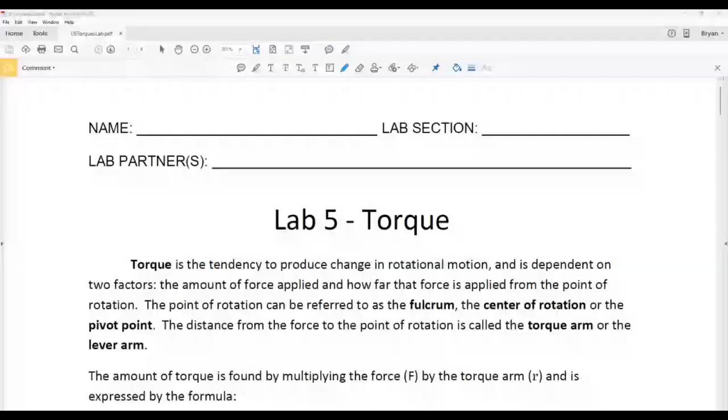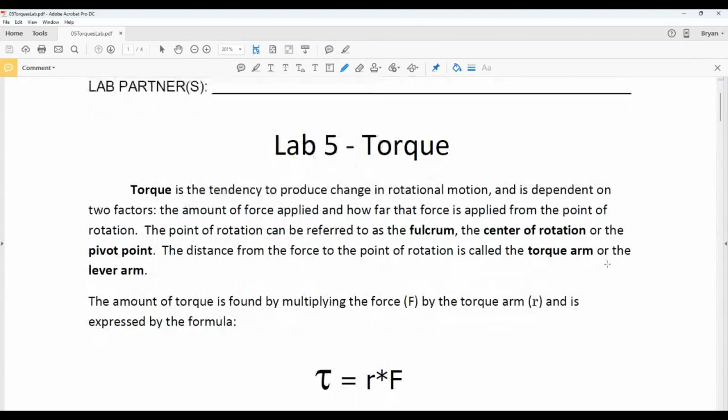All right, so let's go ahead and talk through some of the information necessary to complete Lab 5. In this lab, we're going to be focusing on torque and then balancing torque to look for missing information. So torque in general, because it starts with the letter T, and so do several other things, we have the Greek letter tau. So tau, which just basically looks like a letter T, but it's Greek, so it's kind of fancy looking. This is going to be the radius, or sometimes L for leverage, of the lever arm or torque arm multiplied by whatever force is there.

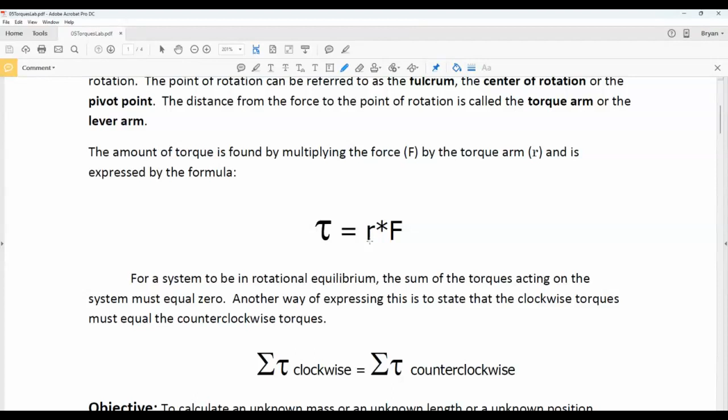So if you want to increase torque, if you've got a constant radius, then you'll need more force. If you have a constant force, you'll need a bigger radius. Then if we combine this with other torques, if we want to achieve balance or equilibrium, then whatever torque we have going in one direction has to be equal and opposite to the torque going in another direction. If you have too much clockwise torque, then obviously it'll turn and go clockwise. If you have too much counterclockwise torque, then it'll turn and go counterclockwise. The only way it can hang in balance is if they're the same.

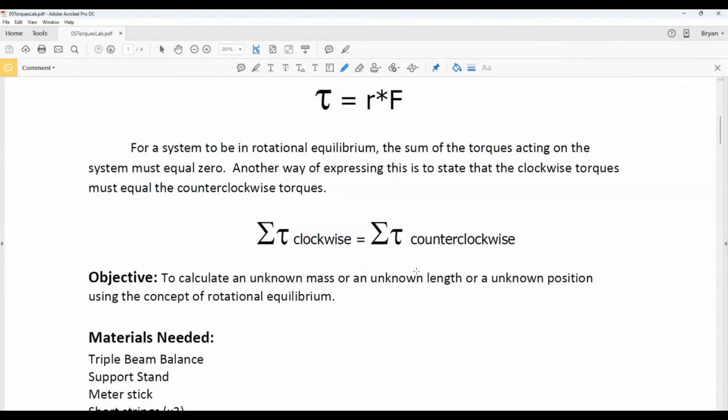Now, we do need to be careful on the wording here a bit. We don't typically want to say that things would just fall down in this case because they're tied off with a physical pivot point or fulcrum. If they don't balance, they're going to rotate around that pivot point. Okay, so, I suppose we can squeeze it in here. It's kind of a setup zero that we want to talk about first.

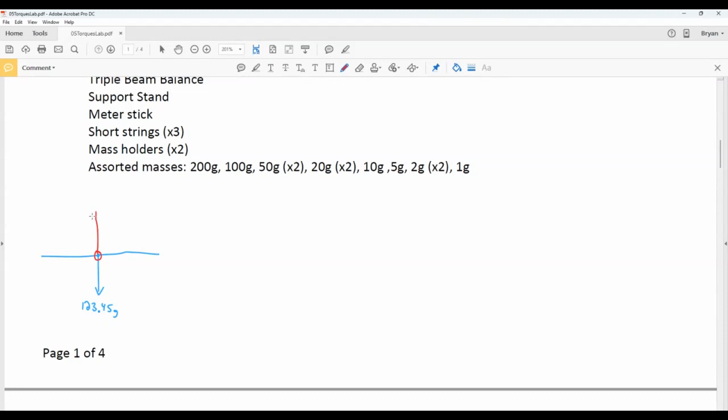So if we draw a meter stick, just a straight line, simplest version of what I can draw, and say that it has a mass that comes down, and I'm going to be very unoriginal with this. Let's say that it's 123.45 grams. Then you probably know already that if I want to support this, if I just want to hold it by, say, tying a string or putting my finger underneath it, and I want to hold it in place with one force and nothing else going on, then I'm going to have to hold that under the middle of the meter stick, which, because 1 meter is 100 centimeters, is going to be 50.

Now, the reason this works is because then the mass of the meter stick itself is directly at the pivot point, has zero leverage or zero radius, and therefore makes zero torque. So that's the reason why it works that way. If we have a meter stick and we hold it in a different spot, again, the mass is going to average out to be in the middle, so 123.45 grams. That's going to be at 50 still, because any reasonably well-made meter stick will have the center of gravity at the middle. But let's say now that I take the string and I move it over slightly. I put it here.

And again, I'm not going to try very hard on these numbers. So let's say that this is at 34.56 centimeters. What's going to happen is that there's a pivot point here, but there's actually something away from the pivot point, something that has leverage. So when we talk about R, we mean the distance from here to here. And what that's going to do is cause this to turn down in that direction. So it's going to create torque.

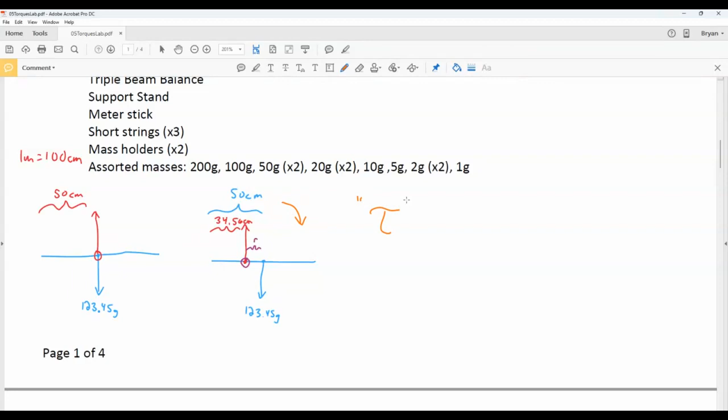In proper units, torque needs to be in newtons and meters, but in improper units, let's just kind of set up and see where this is going at first. So I'm going to say torque, and I'm going to put it in parentheses because it's really not quite proper. Technically, this is supposed to be radius times force like we saw above, but I'm going to say radius times mass, and again, know that this isn't quite proper torque.

So that radius, that distance there, we want to use something called relative position. We need to avoid absolute positions here. So it's not important in my formula that the mass is at 50 centimeters or the string is at 34.56. What is important to me is how far apart those things are from each other. So I want the difference. Look at where the R is drawn in the picture.

I want the difference between these. We're going to assume that the meter stick is well made enough that the center of gravity is going to be exactly at 50. And that's going to be important for significant digits, which we're not going to look at too much today, but it is going to control some of how the rounding happens later.

All right, and then the mass that's here, again, this is improper because normally we should be changing the units, but we can use this to work down and get some kind of answer for this part so far. All right, so again, our improper torque. If we find this difference, then we're going to have 15.44 centimeters. That's going to multiply by the mass that's hanging there, and basically 2, 3, and apparently I can't count.

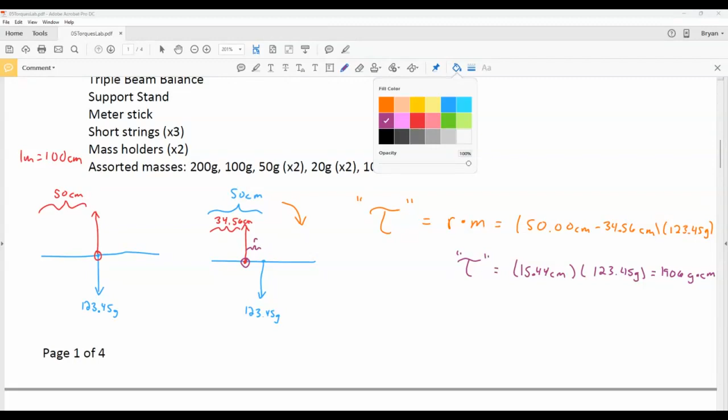To see how this relates to our normal numbers that we'd want to use for torque, we can take and convert this. So notice I didn't put the quotes on it this time, but I can take 1,906 grams times centimeters, stick that over 1, and I can chain together our conversions. So a couple of different ways that we can set this up to streamline things slightly. We want to remember that a kilogram is 1,000 grams. But I'm not going to put 1 kilogram on top, because then we have to take a kilogram and convert it into newtons. If we assume that we're on Earth at roughly sea level like we normally are, then we can sort of chain that together.

1,000 grams technically turns into a kilogram. The kilogram turns into 9.8 newtons. So by the transitive property from geometry way back when, we can say that these two things are equal to each other. Okay, and then also we need to remember that 100 centimeters make 1 meter. Looking at our units and making sure everything cancels the way that we expect. Grams cancel grams, centimeters cancel centimeters, and we get newtons times meters.

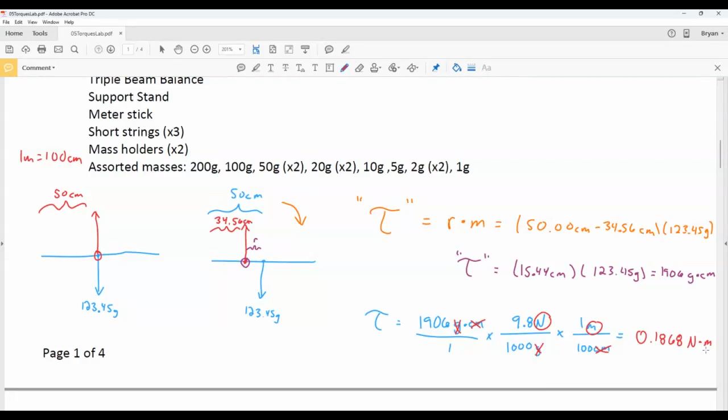Okay, so taking that number and multiplying by 9.8, and then dividing it by 100, and then dividing that by 1,000 is going to give us approximately 0.1868 newtons times meters. So you can see the units are vastly different from each other. Now, a nice thing is going to happen because we're balancing torques with most of these questions. So up here, notice that clockwise torque is equal to counterclockwise torque.

Then even if we do go through the steps and we convert everything into proper torques, those conversions are pretty much going to cancel each other out, because they would have needed to happen with each different set of grams and each different set of centimeters. And so with a single pivot point, you can use just about whatever units you want, as long as they actually measure the stuff you're talking about. So like, you can't measure mass in seconds, because that won't make sense. But you can measure mass in grams or kilograms. You could technically use pounds here if you wanted to, and this equation would still work.

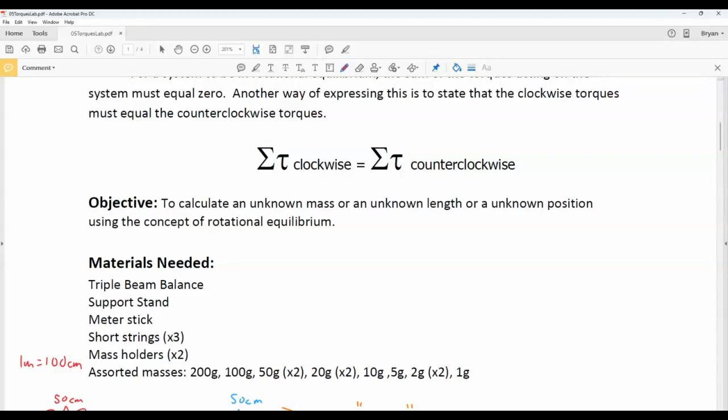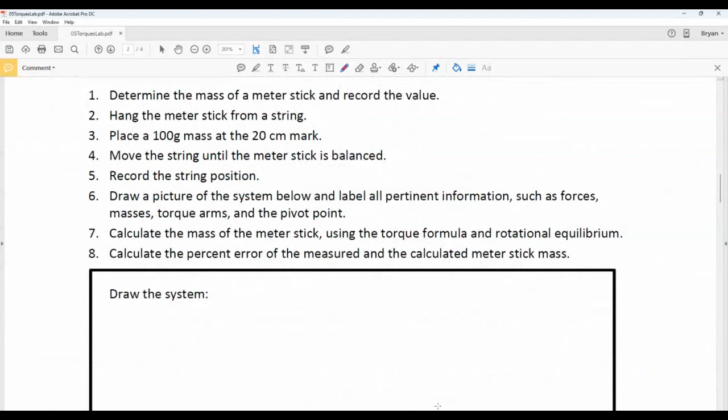Okay, so let's use that information. Again, what we just looked at is kind of like a setup 0, if you will. So if we move on to setup 1, and if we were to follow the instructions here, we're going to take a 100-gram mass, put it at a certain spot. The very first thing we probably want to do is draw this all, so that we can see what's going on. All right, so we're going to draw the meter stick first, and then basically before we do anything else, we want to make sure that we remember that it has a center of gravity in the middle, so the mass is going to average to be the middle.

All right, so here's my meter stick, and then the very first thing, we'll draw a line down. Now for right now, we're pretending we don't know what this mass is, so just M, and that's a little s for mass of the stick. And assuming it's a reasonably well-made meter stick, then this is going to happen at 50.

Okay, and then it tells us that we're going to put a 100-gram mass in another position. So this one's going to go at the 20 centimeter mark. Okay, and so I hope it makes sense. I'm going to draw a couple of things that are wrong first.

But let's say that I try to put my string over here to balance everything, then notice that all my torques are going to go around in that direction, and there's no chance that it was ever going to balance. Likewise, if I try to put my string somewhere over here and make that pull up, then everything's trying to go around in this direction, and they're working together. There's no chance that they were ever going to balance each other.

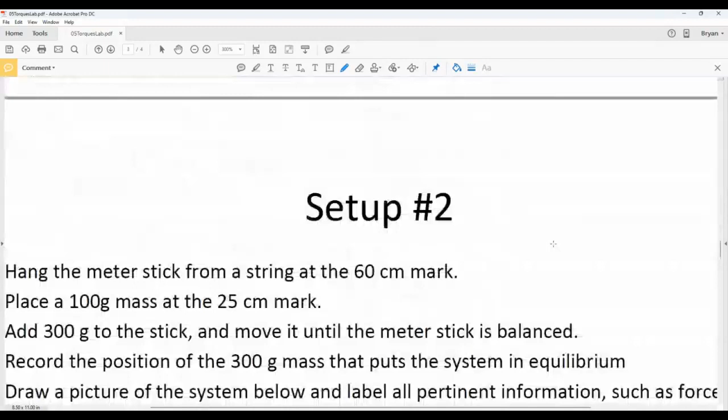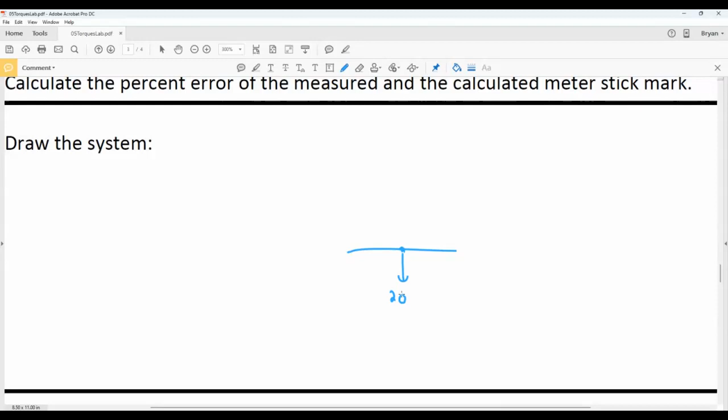Eventually I'll get there. But the first part is still exactly the same. We're going to want to draw a meter stick. I always draw the center of mass first because this is the main part that students will forget when they get stuck. They'll draw a picture and try to set up a formula. And if they are missing information, it's usually this part, because you don't physically see anything for it the way you would if you were to build the other setups.

Okay, then now reading the directions a little bit further, at the 25 centimeter mark, so halfway from 0 to 50, we have a 100 gram mass. Okay, and then we have a string tied at 60. So the string is tied here.

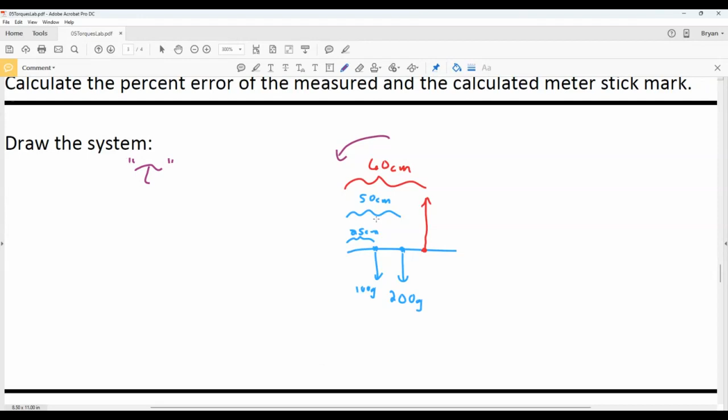Now, relative to the example I gave earlier, whenever we were holding the meter stick off center and we weren't doing any other forces or masses hanging there, then if you only have torque in one direction, then things are going to go in that direction. So if I'm looking this way and I don't read the rest of the question yet, then there's no chance that this was ever going to balance, because these two things are both going to make torque. And again, that's torque. That's going to work together and try to turn even more in the same direction.

So let's set up and see if we can find that number so far, and then use that to finish solving whatever's left over. So if we go from left to right, thinking from 0 to 100, then the first object that's there is sitting at the 25 centimeter mark. But remember, you want to think of relative positions. So 25 centimeters needs to be taken away from the string position so that we can find out how much leverage it has, and we need to pay attention to what's hanging there. And plus sign, these torques are working with each other.

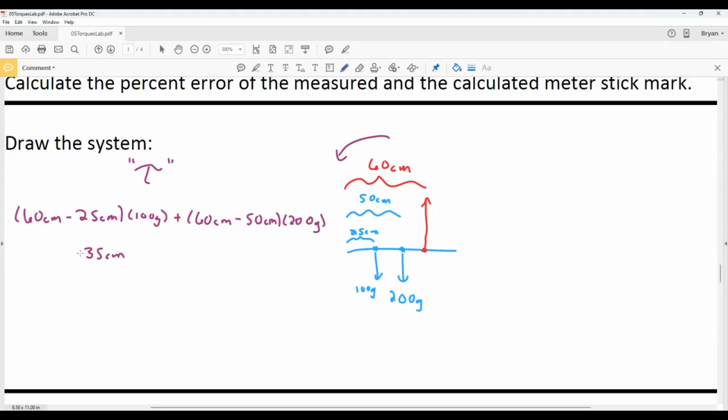This other one compares to the 60 where the string is, but this is the mass that averages at 50. And then the mass that's hanging there is the full mass of the stick, because that's how the center of gravity works, and that's going to be 200. So this thing we can simplify down a fair bit. We can find each of these relative positions by subtracting through and finding these differences.

So we get 35 and 10 centimeters respectively, multiplied by their masses, and that's going to give us individual torque type measurements for these. The first one works itself out to be 3,500 grams times centimeters, and the second one works out to be 2,000 grams times centimeters. So working together, these things combined will give us 5,500 grams times centimeters.

And whatever torque is made there has to be balanced out by a torque that happens equal and opposite. So there's no way that it can still be turning in the same direction. I need to somehow have that amount of torque going the other way. And that's where, if we read the last part of the question, we can figure out what's going on. We have a 300 gram mass that has to go somewhere. And as it turns out, that's going to need to be over here so that we can balance that part out. So 300 grams. We don't know where that's going to need to go. So for right now, we'll just draw in and we'll call that R.

Which makes this side actually very simple. R is that relative position, because that's how the formula works, multiplied by the 300 grams that are hanging there. And that doesn't simplify or do anything. So that's really just going to come down and come into my formula. All right, then as far as the units, we can cancel the grams first, as long as you do it at some point, but we can do it now to have less to write down. We would divide by 300 in order to work this down to R, and then we get that R is 18 1/3, so 18.33 centimeters.

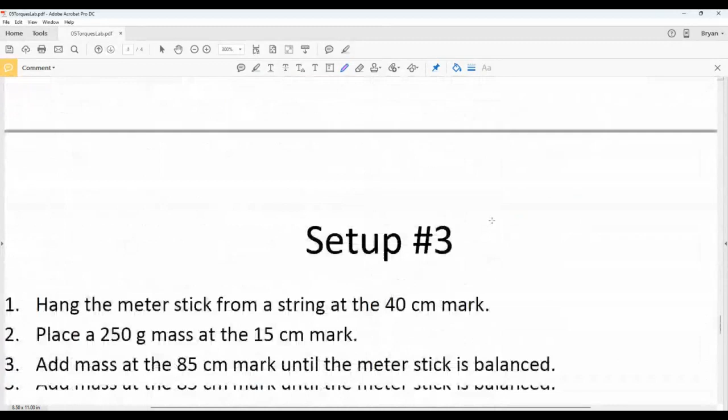And as always, let's draw this first. Start by drawing just the meter stick and seeing what that's going to do. So, meter stick at the middle is the mass of the stick. We'll go ahead and use 200 grams again, just because it's nice and easy. This is at 50 centimeters, again, if it's a reasonably well-made meter stick. Okay, then reading some more of the information here, going through the steps that are up there above.

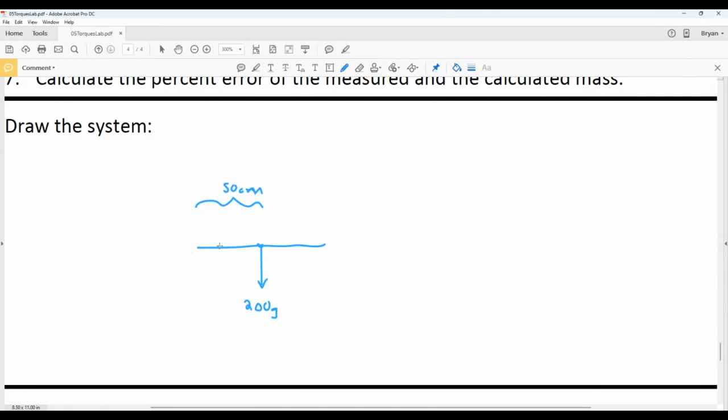This has at the 15 centimeter mark, which is going to be somewhere over here, a 250 gram mass. So that's at 15. Then the string is at 40, so that's going to be between these. And if there's nothing else, these aren't going to balance each other. So we've got another mass way downtown.

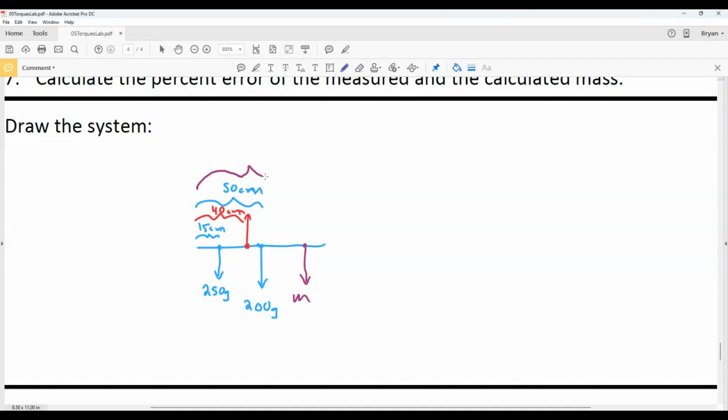We don't know what this is yet, so we're just going to say M, but we do know its position, so 85 centimeters. So in this question, we have all of our positions set, and we're looking for some additional mass. We need to know what's there. So we know where it needs to go. We just need to know how much is going to have to hang there.

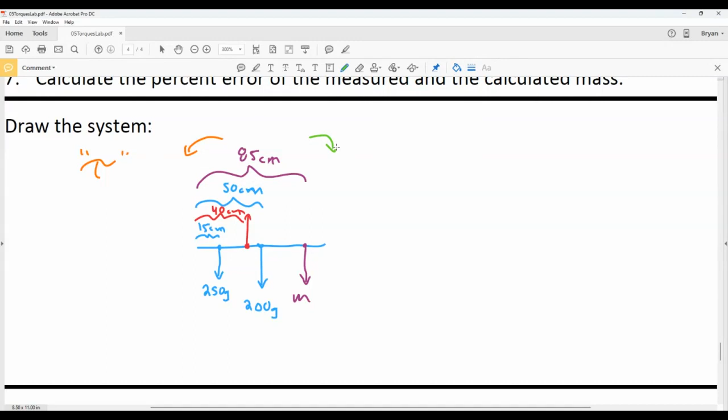Okay, so we need to look at, again, torque. It's not real torque, but it'll work out for what we need going around in one direction, and then we need to see how much is going around in the opposite direction. And for this to achieve balance, those have to be equal to each other. Okay, so let's do that. Let's see where this can get. We want relative position, so find the difference between 40 and 15, and then multiply by the mass that's hanging there.

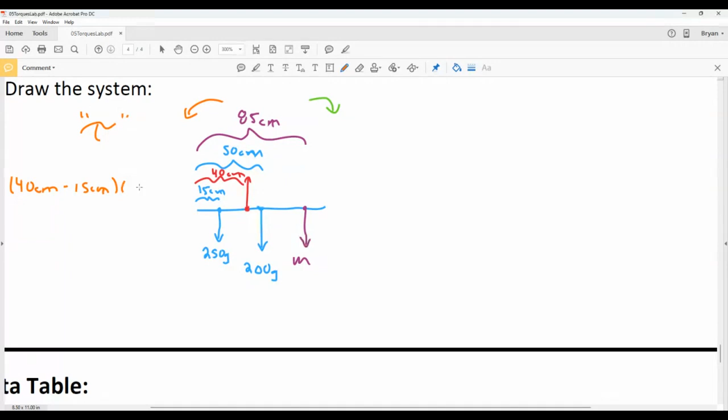Sorry, Adobe keeps trying to fix my handwriting. It's making it worse. I don't need help to have bad handwriting.

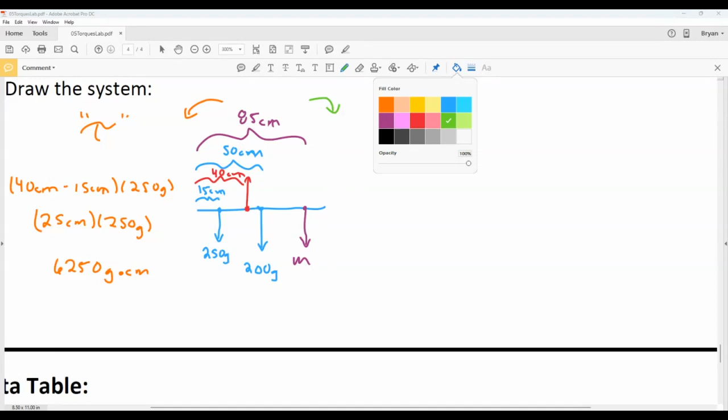All right, so looking at the difference here, this is 25 centimeters multiplied by the 250 grams that's hanging there, and then our torque adjacent measurement is going to be the product of those, which is 6250 grams times centimeters. So whatever's trying to pull and go in the other direction has to be equal and opposite to that, so we need to work through these numbers.

Okay, first, the mass of the stick itself relative to the string is going to give us 50 centimeters minus 40 centimeters. So like all of these, we need the difference. Every time we see centimeters, we're going to see the number of centimeters for the string position. Everything gets compared to that. The mass that's hanging there is the full mass of the stick itself, which is 200 grams, and plus sign, that's going to combine with whatever's out here.

So we don't know the mass for that part, but we do know its position. So 85 minus 40 is going to show us that it has a leverage of 45 centimeters. But again, we don't know what the mass is, so we can't make a full torque type measurement for that. Okay, but we can simplify down a bit. You just need to be careful with how much.

It is a very, very common student mistake, even after I talk about it, that students will try to combine things that they're not allowed to. You need to pay attention to things like units, first of all, but then even going back to your plain algebra skills, you need to make sure you're paying attention to variables and constants, basically numbers compared to letters.

It is not going to be possible for us to combine everything here because this has a variable in it. It has an m for an unknown mass, and this doesn't. We can't add these anyway, because even though these are weird units of grams centimeters and it sounds like gibberish, it is not the same gibberish as these centimeters that we have on the other part. So these cannot be put together.

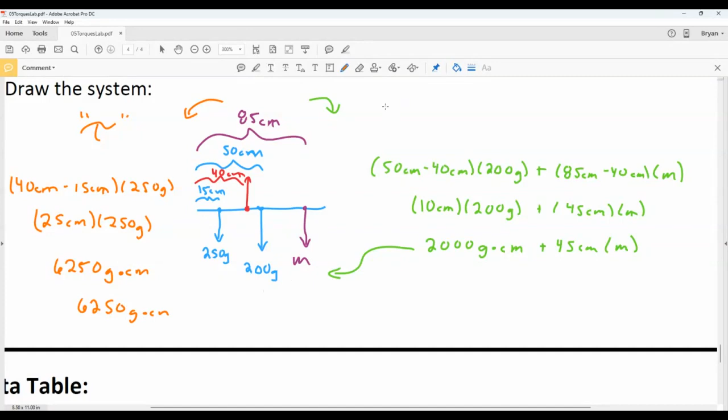Okay, so setting these to each other for the last time. Do not combine these. It is not possible. It is not allowed. Bad things will happen. It cannot be done. But what we can do is look, hey, this thing is like this thing. We've got grams centimeters over there.

And what we're doing from this is basically we're taking the total amount of torque that we know we're supposed to cancel and subtracting away the part that we already know about. And so whatever's left over here is going to be the amount of torque left over that this other thing has to make. And that is where we're going to make progress.

So this difference, 4250 grams times centimeters, is equal to my 45 centimeters multiplied by the mass that I still don't know. But the good news is we don't have very many steps left. We're almost there. These centimeters can cancel with these centimeters. So now I think we can see where the grams come from. We want to get just the m here so we can divide by the number that's in front.

And so that's going to tell us that this mass, it's going to have some repeating numbers in there, but I suppose it's not too much of a problem. We'll get 94.44 grams. And because in the classroom when we build these, we can only build whole numbers of grams. I don't have half gram and quarter gram plates or 0.1 gram masses to hang and add to these. Then a lot of times we will get an answer that's a little bit further off on this one.